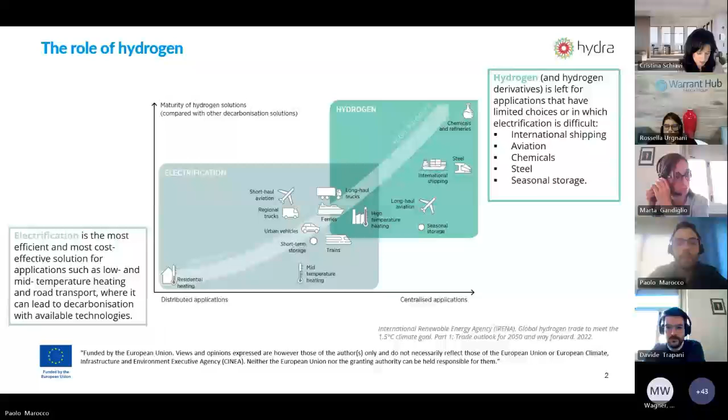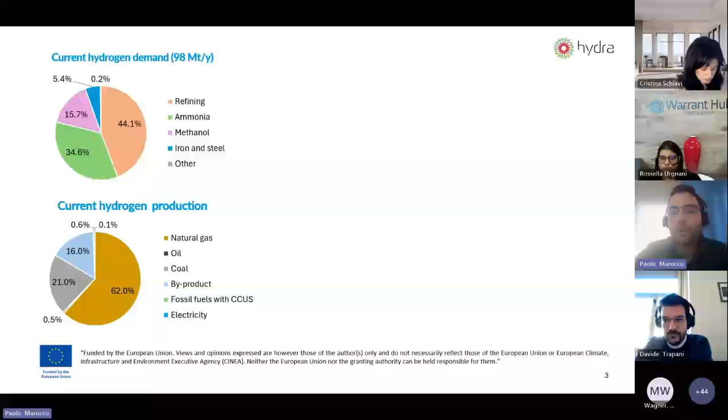So if we want to achieve the main decarbonization targets, we need to produce hydrogen in a sustainable way, and we also need mainly to increase the capacity of electrolyzers.

This is a picture of the hydrogen demand for the current case, but also the expected hydrogen demand in the future. We can see that in 2050, it is expected that the overall hydrogen demand will be around 5 to 6 times higher than the current one. We can see an increase in the demand for industry, but also the appearance of new applications: road mobility, aviation, shipping, and also power production.

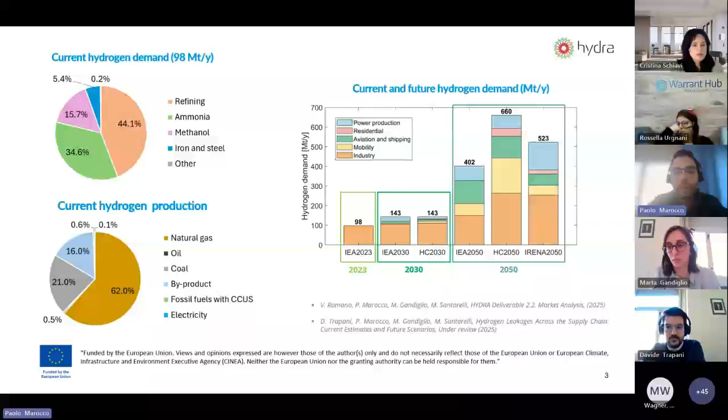In the following slide, we will show a very brief explanation of some key sectors. Starting with the transportation sector, we have batteries that, due to their great efficiency, are the choice to prefer if they are technically feasible.

But when we have mainly weight constraints, batteries are ideal for short to medium distances. As we can see from this graph, they are located in the lower left part, so for vehicles with low weight and also short autonomy. But moving to heavy-duty vehicles that require higher autonomies, we also have the appearance of hydrogen as a good solution for decarbonization.

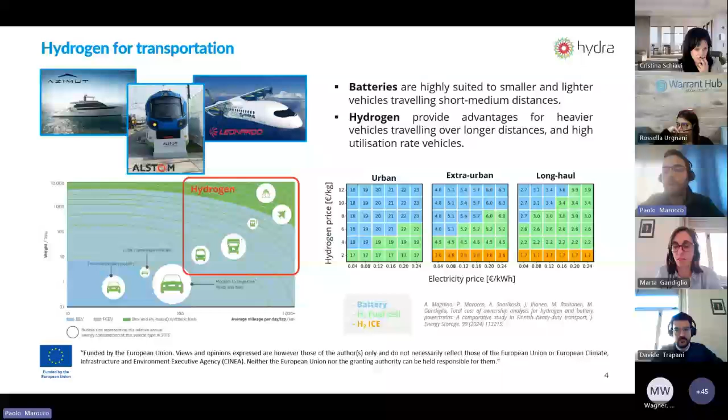The same concept is also clearly shown here, where we have the optimal technology for transport as a function of the electricity price and the hydrogen price. The blue area refers to batteries, whereas the green area refers to the use of fuel cells. We can see that if we move from urban vehicles up to long-haul applications, we have an expansion of the green area, meaning that fuel cells become more and more effective by moving towards heavier duty vehicles.

But hydrogen is also very promising as a long-term energy storage. Here we have a comparison between battery storage and hydrogen storage. Batteries are very promising due to their very high efficiency, which is almost 3 times higher, I mean the round trip efficiency of the storage, than that of hydrogen.

But if we look at the cost to store one unit of energy, so euro per kilowatt hour, we have that the cost of batteries is very high compared to that of hydrogen. This means that batteries are highly effective for short-term energy storage, but hydrogen is also very useful if we move towards seasonal storage. This concept is visible from this picture, which shows the cost of energy as a function of CO2 reduced in the energy system.

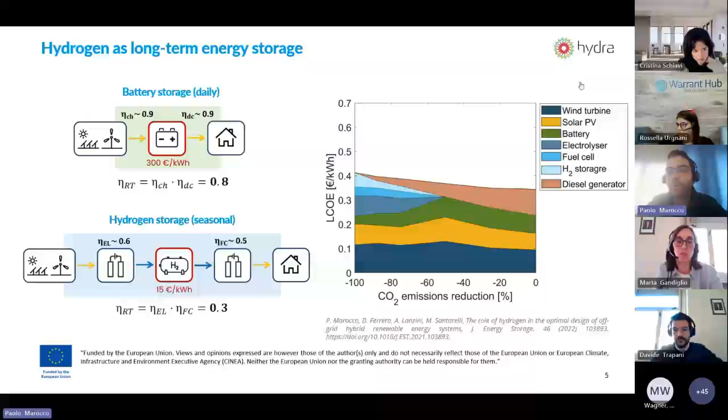This refers to a specific energy system in Northern Europe. We can see that if we decrease the amount of CO2 emissions, we have an increase in the cost of energy. This is because we need to install more renewable power and also more energy storage to cope with this intermittent renewable production.

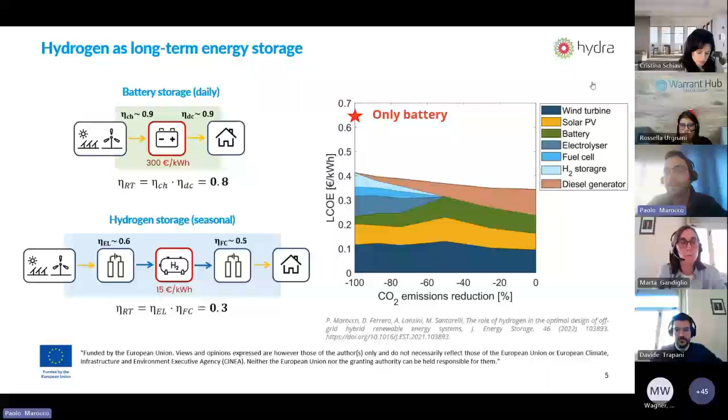We can see that at a certain point, we have also the presence of hydrogen, the blue area, since hydrogen is highly effective to keep low the cost of energy when moving towards a high renewable scenario. This is particularly evident if we compare the cost of hydrogen in the full renewable solution with that of only batteries. If we have only batteries, the cost is very high, but if we have a hybrid solution with both batteries and hydrogen, we can reduce considerably the final cost.

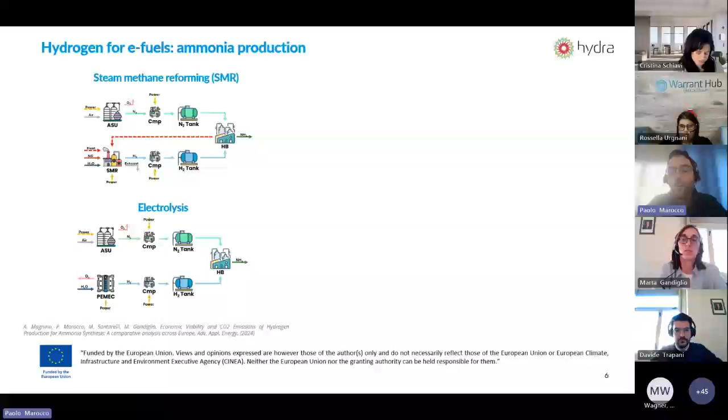Finally, hydrogen is also very effective and can have a role in the production of e-fuels, can be reacted with carbon dioxide to generate carbon-based fuels, but also with nitrogen to generate ammonia. In the upper part, we have the current configuration for the production of ammonia, which is based on natural gas. In the lower part, we have a configuration where hydrogen is generated by considering water electrolysis.

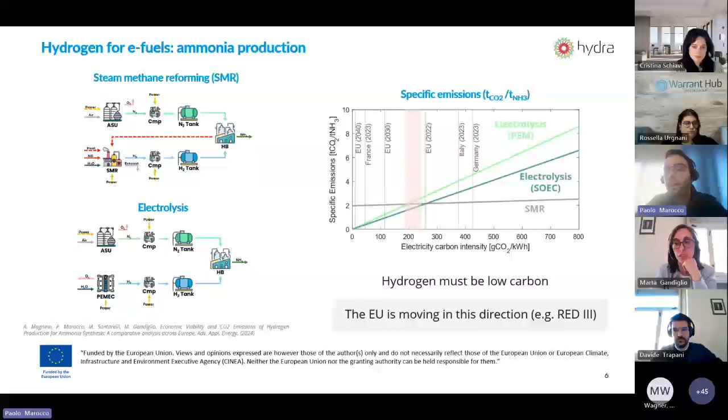And the European Union is moving towards this direction, by setting constraints to produce renewable hydrogen, for example, the recent RED III directive.

Finally, I would like to end this presentation with the example for Italy. In the last few years, several funding have been allocated to hydrogen-based initiatives. This is the example of the PNRR initiative, where funds have been set for the entire supply chain of hydrogen, as we can see from this picture. So for hydrogen production, but also for hydrogen use, hydrogen manufacturing of electrolyzers, research and development.

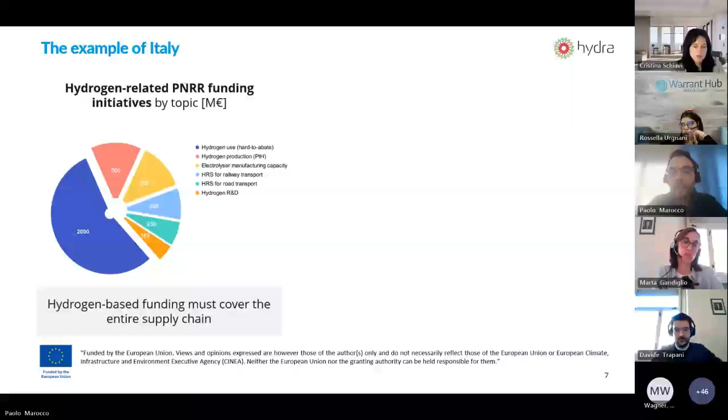I think that this holistic approach is the ideal way to promote the use of hydrogen, not only providing funding for hydrogen production, but also promoting hydrogen demand. This is a scheme that shows the location across Italy of the main hydrogen initiatives and projects that have been funded, in terms of hydrogen production plants, the green dots, but also hydrogen refueling stations, and we can see also hydrogen-based railway lines.

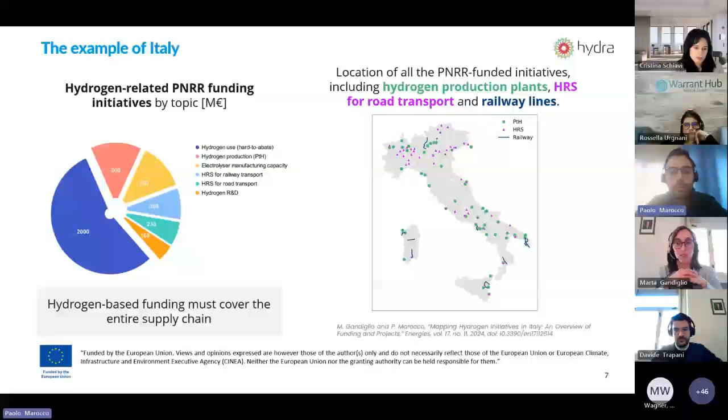Thank you for the attention.

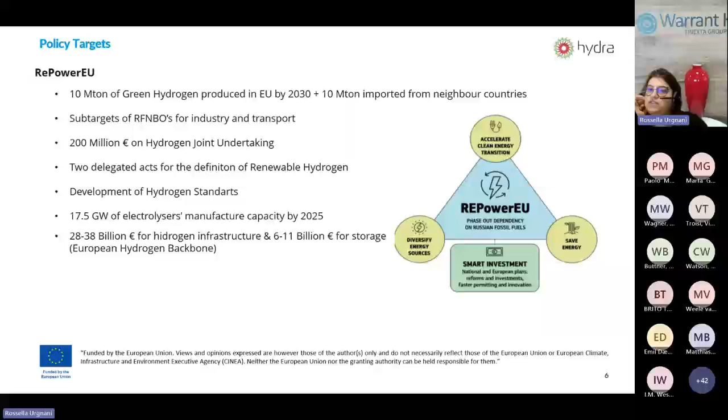And then finally, RePowerEU focuses on creating new hydrogen regulation and standards and keeping track of the hydrogen uptake through periodic reports. So the plan estimates a need for a very fast deployment of infrastructure to reach the requirements of the hydrogen economy, expecting investments of 28 to 38 billion euros for hydrogen infrastructure and 6 to 11 billion for storage infrastructures.

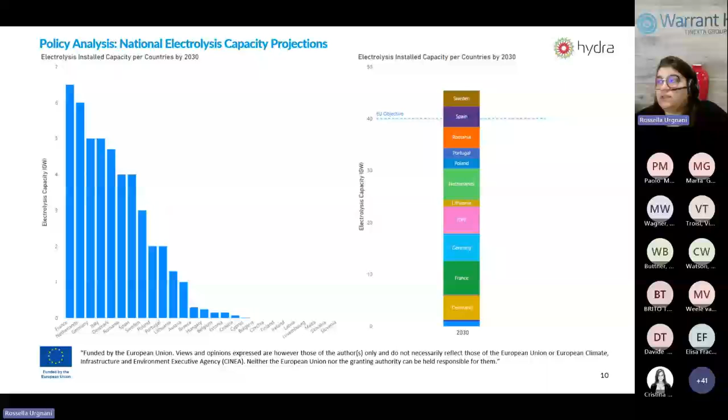A similar analysis was also done considering main countries that have developed hydrogen strategies or have the potential to do so at global level. Outside the European Union, we have even more significant differences. Some countries clearly aim to influence the global hydrogen economy and compete for international trade, while others focus more on just meeting their domestic demand. There are also differences in the goals that were set, because some set just short-term goals, while others looked at more long-term goals, while others even just proposed strategies without setting any goal.

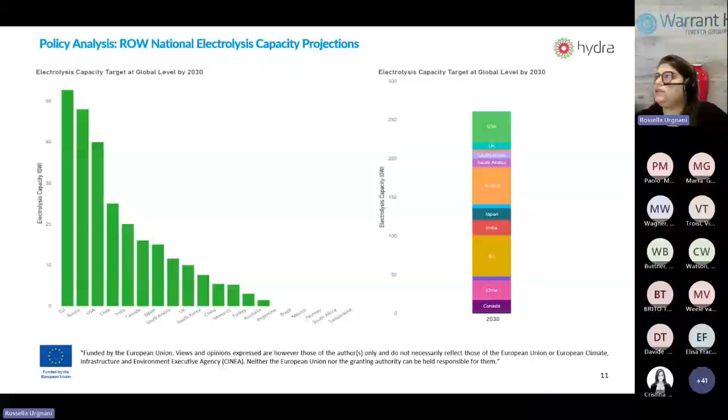However, if we do the same as we did for the European Union and sum all the contributions, by 2030 at global level, the electrolysis capacity could overcome 250 gigawatts.

So just to briefly conclude, from our analysis we have seen that policies are focusing on hydrogen in the last decades, mainly for its production and use in the transport and industrial sector. This is the priority. Our analysis also highlights that the use of direct investment is the main economic instrument to promote hydrogen projects, as well as setting codes and standards for the regulatory instrument part.

However, if we expect a significant impact on the decarbonization of the economy from hydrogen, then we need an aligned legislative effort for all energy sectors and links in the value chain.

It is crucial that hydrogen consumption covers as many appropriate sectors as possible to make the deployment of large production plants profitable. The transition process towards a unified industry cannot be overlooked. So in the short term, generation and consumption may be unbalanced, and it will be necessary to adapt current systems to a new reality of low CO2 emissions and hydrogen consumption.

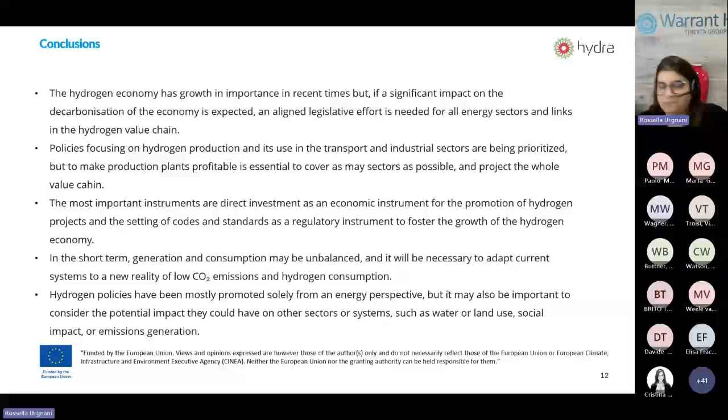Okay, so this was the end of my presentation.

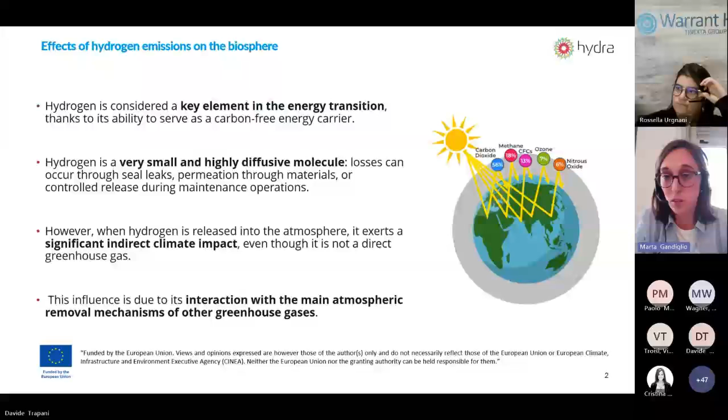Hydrogen is not a greenhouse gas like the ones you can see in the slide, so it doesn't have a direct radiative effect, but it is called an indirect greenhouse gas in the sense that it interacts and alters the mechanism of removal of greenhouse gases within the atmosphere. Let's look at where hydrogen interferes in the atmosphere. Here you can see the atmosphere layers, and hydrogen is changing the equilibrium of the atmosphere in the troposphere and in the stratosphere, so in the two lower layers.

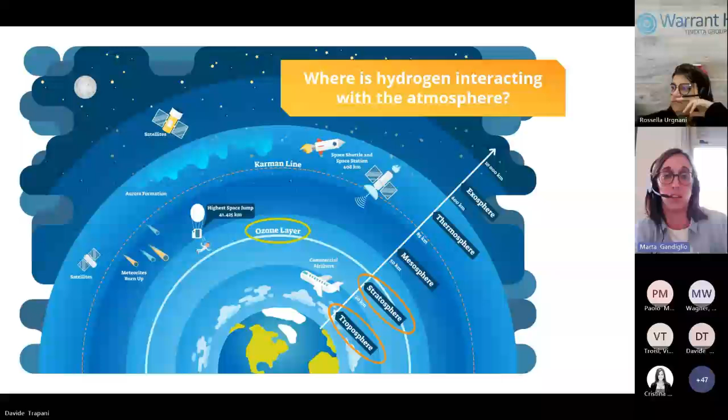Let's see the effects one by one, starting from the troposphere. The first effect is that when hydrogen is released, part of it is absorbed by the soil, but the remaining part is removed through oxidation. In particular, hydrogen oxidation requires and consumes hydroxyl radicals, these OH ions, and this is a problem because these hydroxyls are responsible for methane removal in the atmosphere. By reacting with these radicals, methane is, through a series of reactions, then converted to CO2. So if we use these radicals to oxidate hydrogen, we will have more methane in the troposphere.

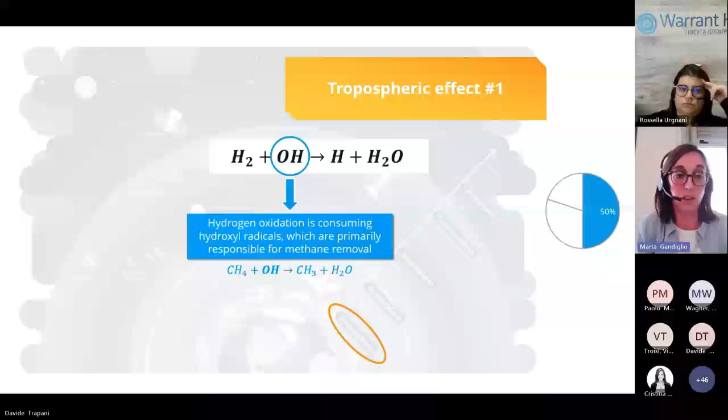This will increase the lifetime of methane in the troposphere. This is the largest climate effect of hydrogen, accounting for about 50% of its climate impact.

The second effect, again in the troposphere, is linked with the production of atomic hydrogen. When hydrogen is oxidized, it produces atomic hydrogen, and atomic hydrogen, through a series of different reactions, increases ozone in the troposphere, which is a greenhouse gas. This effect accounts for 20% of the climate impact of hydrogen.

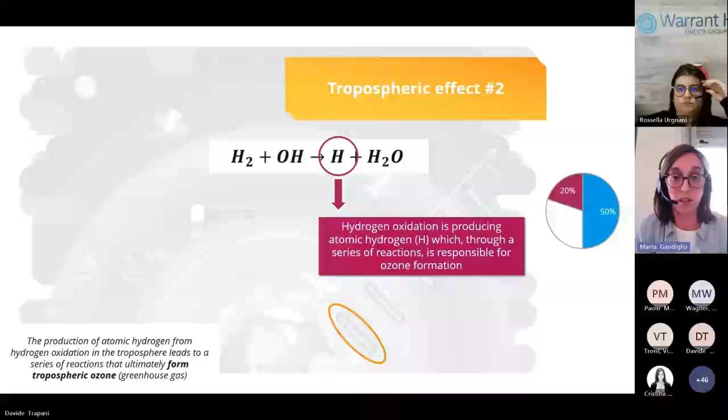The last effect, which has been discovered more recently, occurs in the stratosphere and is related to water vapor formation. In the stratosphere, when water vapor is formed from hydrogen oxidation, the effect is that the stratosphere is cooled down, so the temperature of the stratosphere is reduced.

This stratospheric cooling leads to mainly two effects. The major one is that, being at a lower temperature, the stratosphere emits less radiation back to space, so we have more heat trapped within the atmosphere, having an effect on global warming. The second, minor effect is that the water vapor is also responsible for the formation of polar stratospheric clouds, which reduce the ozone layer that protects us from UV radiation.

If we consider all these effects together, we can calculate the global warming potential of hydrogen, which is the amount of energy absorbed in the atmosphere over a certain time horizon compared to that of CO2. The global warming potential of CO2 is 1. Here you can see the graph for the global warming potential of hydrogen over 20 and 100 years. In 20 years, especially in the short term, the effect of hydrogen can be 20 to 45 times that of CO2, and in 100 years it can be between 4 and 18, depending on the quite big range of uncertainty.

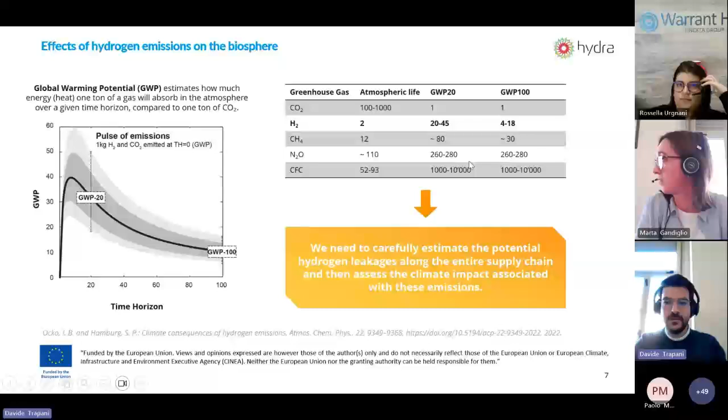In the final remark of Marta's presentation, she mentioned the hydrogen supply chain, and this is the starting point of my presentation. I would like to start exploring the concept of hydrogen supply chain. Typically this term is used to describe the entire set of processes that are carried out from hydrogen production to hydrogen uses.

The starting point of our activity is shown in this slide, in which we present our structure of the hydrogen supply chain. The supply chain consists of 5 main stages: production, handling, storage, transport, and end uses. To develop a leakage estimation framework, the first step of our activity was a disaggregation of this supply chain structure into the processes that can be identified in each stage of the supply chain.

So we decided to disaggregate hydrogen production, considering the well-established technologies used at present, and the most promising technologies that can be adopted in the near future and in long-term scenarios. For hydrogen production, we considered production through electrolysis, steam methane reforming both conventional and equipped with carbon capture utilization and storage technologies, and also coal gasification.

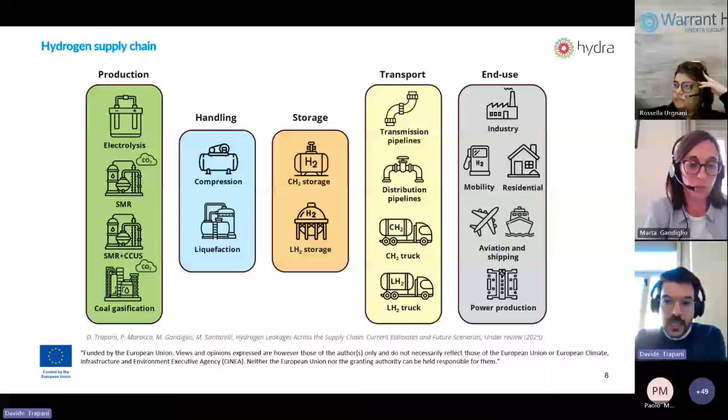Hydrogen leakages can occur in each stage of the hydrogen supply chain I've just described. They are usually classified as intentional or unintentional. If we focus on unintentional hydrogen leakages, they can be further distinguished into operational and fugitive emissions. For operational leakages, we can consider the residual hydrogen stream in exhaust gas flow, for example hydrogen crossover in electrolyzers, but also the boil-off losses that are peculiar to liquid hydrogen storage solutions.

If we focus on fugitive emissions, they can happen as a leakage from equipment, though these are usually negligible, but also from pipework—pipes, valves, joints, and seals. Focusing on pipelines, we also have hydrogen diffusion from the pipeline itself, and the last fugitive leakage can occur as permeation from storage tanks. If we focus on intentional hydrogen leakages, they are only operational, mostly related to purging and venting operations, mainly in hydrogen production, storage, or refueling operations.

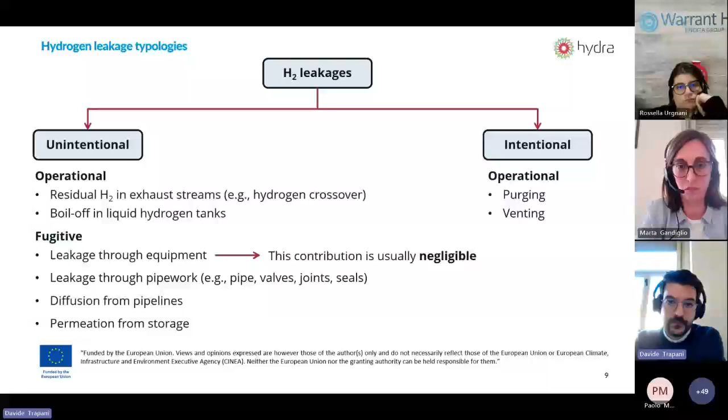Hydrogen leakages can occur throughout the hydrogen value chain, but at present the exact amount of hydrogen that is emitted and lost into the atmosphere is almost unknown, due to the lack of proper instruments able to detect part-per-billion concentrations. The sensors currently available at industrial level are installed mainly for safety purposes, so they are only able to detect hydrogen concentration in a part-per-million range. This is the main reason behind the lack of direct measurement.

So if you want an estimate of the hydrogen leakage rate along the value chain, we have to rely on estimates from literature. In our case, literature includes both peer-reviewed articles—scientific papers—but also technical reports. Technical reports turn out to be extremely useful because they are based on the technical expertise from industrial professionals, reflecting direct or field experience on existing technologies. So technical reports provided valuable insights for estimating hydrogen leakage.

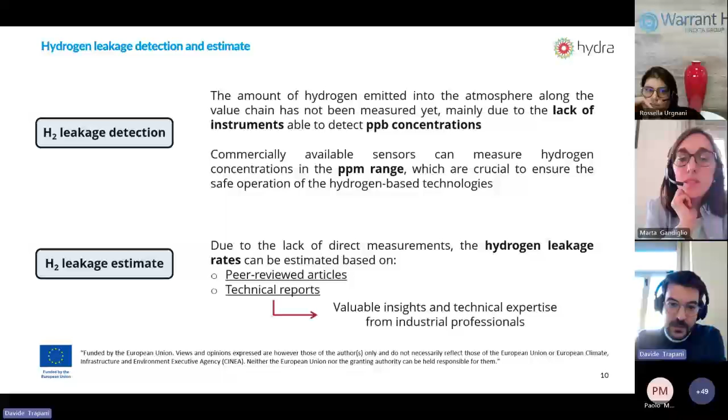The next step, in order to create the leakage estimation framework I was mentioning, was the identification and disaggregation of the hydrogen value chain. The next step was data collection and the creation of a comprehensive database of the hydrogen leakage rates per each stage of the hydrogen supply chain. Based on data collection from the literature, we were able to estimate the average leakage rate, and to identify a minimum-maximum variation for each technology and process.

And this is one of the main results of the activity we have carried out in the framework of the Hydra project. If we focus a bit on the numbers and results of this database, we can see that electrolysis exhibits the highest leakage rate and also the largest variation among the hydrogen production routes.

So comparing renewable or low carbon hydrogen with alternative, both conventional and innovative solutions, electrolysis is one of the most leakage-prone processes.

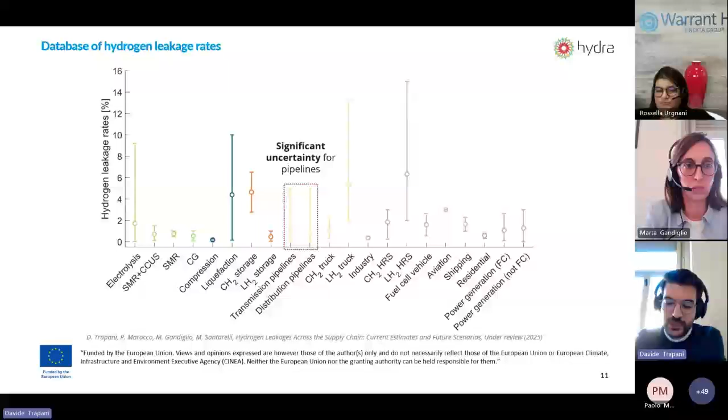We saw that electrolysis is one of the most leakage-prone processes. I would like to focus a bit on electrolysis and electrolyzers to describe the main and potential hydrogen leakage sources that can cause hydrogen emission in these technologies.

As we saw before, usually the leakages through the casing and the pipework can be negligible. This is especially true for electrolyzers, because the manufacturing has to be compliant with ISO standard 22734. So in this case, this contribution can be considered negligible.

But the main hydrogen leakage phenomena are related to venting and purging, as I said before. For venting, hydrogen is released into the atmosphere during startup and shutdown operations. In this case, hydrogen venting can be estimated as 0.1% of hydrogen production. This is obviously dependent on the number of startup and shutdown procedures carried out during a year.

This can obviously depend on the operating strategy of the electrolyzer itself, but we can estimate that between 50 and 300 startup and shutdown procedures are performed every year, and each procedure can last between 5 and 10 minutes. So we can basically calculate the amount of hydrogen released per year due to this kind of operation.

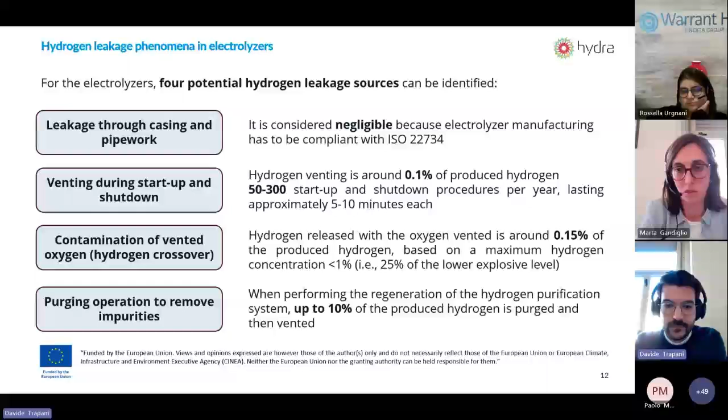If we move forward in the development of our leakage estimation framework, we have identified the processes in the hydrogen supply chain and characterized each process with an estimate of the hydrogen leakage rate. So we now need data related to hydrogen demand and the hydrogen quantities flowing in each step of the hydrogen supply chain itself.

To do so, we relied on hydrogen demand data and hydrogen supply chain structure from leading international organizations in the energy sector, in particular the International Energy Agency, the Hydrogen Council, and the International Renewable Energy Agency. Based on the data available from these organizations, we were able to identify, define, and assess hydrogen scenarios at present.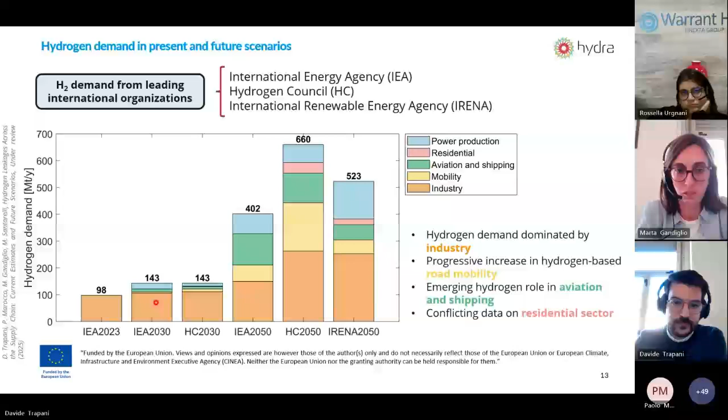So basically, to sum up what we have done: combining the leakage rate and the hydrogen quantity in each stage of the supply chain, we were able to estimate the hydrogen leakages along the supply chain. In this slide, we have summarized all the results for the different scenarios.

According to data provided by the International Energy Agency for 2023, we can estimate that at present 1.3 million tons of hydrogen are emitted to the atmosphere per year based on the existing scenario. These leakages increase by almost a factor of 3 in both the IEA and Hydrogen Council scenarios for 2030, and dramatically increase for long-term scenarios, reaching up to 45.3 million tons per year in the Hydrogen Council scenario, while estimates for the International Energy Agency and IRENA for 2050 are almost around 24 million tons per year.

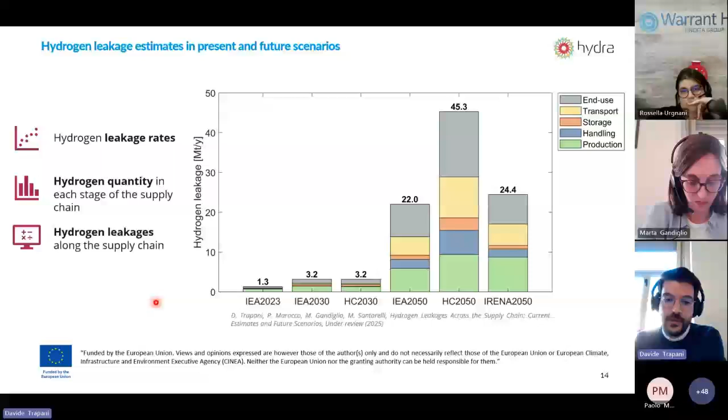If we compare this number with the projected hydrogen demand, we can estimate a leakage rate for the entire supply chain. For the present scenario, it can be estimated at 1.3%, while for 2030 it's around 2.2% for both scenarios under investigation, and for the 2050 scenario it can range from 4.7 up to 6.9%.

We double-checked our results with data available in the literature, and we found that these results are consistent with literature estimates, reporting a value of 1.2% for the 2020 scenario and a leakage rate in the range between 4.5 and 5.6% for the 2050 scenario. So the methodology we developed is robust, and the results are in line with strong references available in the literature.

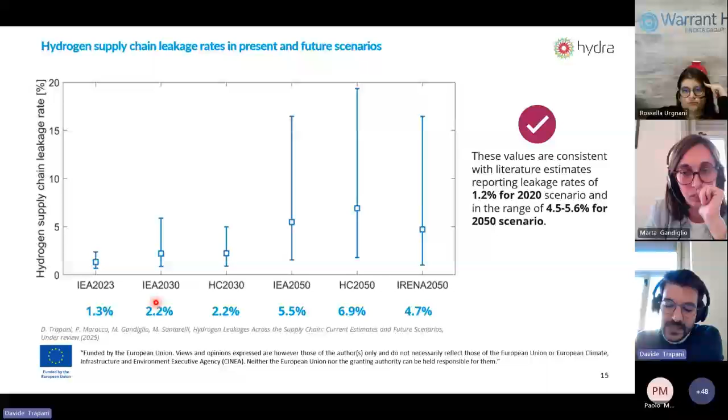But we moved forward compared to what is usually done in the literature, because we tried to identify the main responsible factors for hydrogen leakages along the supply chain. To do so, we performed a hydrogen leakage breakdown for both the 2030 and 2050 scenarios, with the aim of identifying the processes responsible for the largest shares of hydrogen leakage.

If we focus on the 2030 scenario, we can see that electrolysis, despite covering a limited share of hydrogen demand, is responsible for more than 50% of the total leakages released during the production stage.

If we focus on the pie chart on the right-hand side of the slide, we can see that Hydrogen Council was one of the scenarios projecting demand in the residential sector. This implies both a leakage in the residential end uses themselves, but also a leakage in the distribution pipelines that are the solution adopted to serve the residential demand.

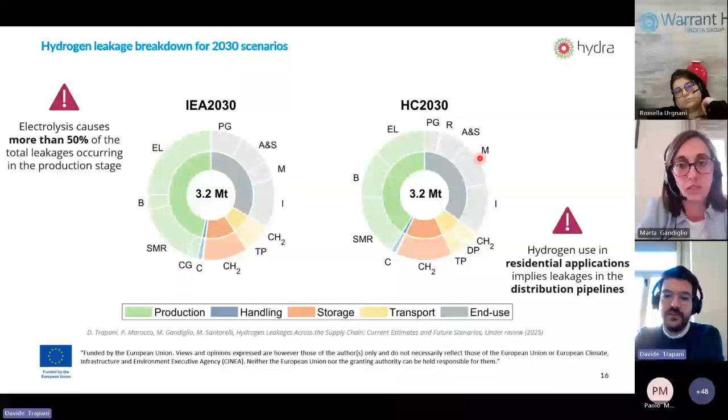If we go to the 2050 scenarios, we can see that in all scenarios electrolysis confirms its potential critical role among the different production pathways. This is a very interesting result, because all the 2050 scenarios have a large reliance on these technologies, but we have to take into consideration this potential criticality.

We can also note that liquid hydrogen emerges as a key contributor in both the handling and transport phases, which was not true for the 2030 scenario. So in the long-term scenario, liquid hydrogen will be responsible for a large share of hydrogen leakages in the different phases of the hydrogen supply chain.

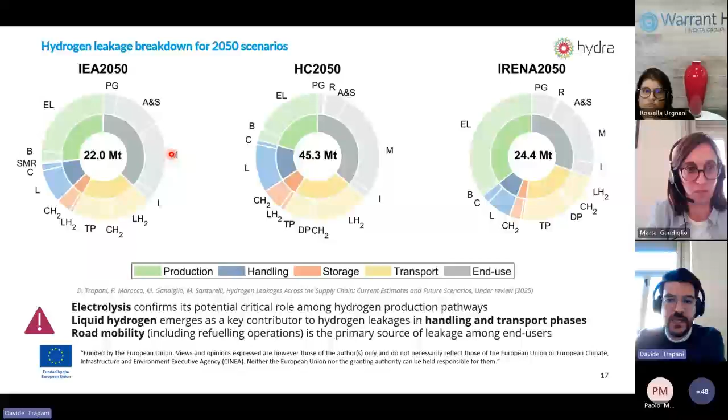We can also note that road mobility, including refueling operations, will be one of the primary leakage sources among end users, as we can see in all the pie charts in the slides.

So to go to the conclusions and take-home messages from the presentation: we saw in Marta's presentation that hydrogen is not a greenhouse gas, but it does contribute with an indirect climate effect. Hydrogen leakage, we saw, can occur at each stage of the supply chain.

And basically, the amount of hydrogen leakage is still unknown. So we also noted that when we try to quantify the hydrogen leakage rate, we face a lot of uncertainty that translates into a significant variability in the hydrogen leakage rate.

If we focus on the result, we can note that electrolysis emerges as a leakage-prone process among the production pathways, and liquid hydrogen involves multiple critical processes like liquefaction, transport, and refueling.

Therefore, in order to fully exploit the hydrogen potential for the energy transition, we need a precise and reliable sensor and monitoring procedure to quantify the hydrogen leakage phenomena and to mitigate them.

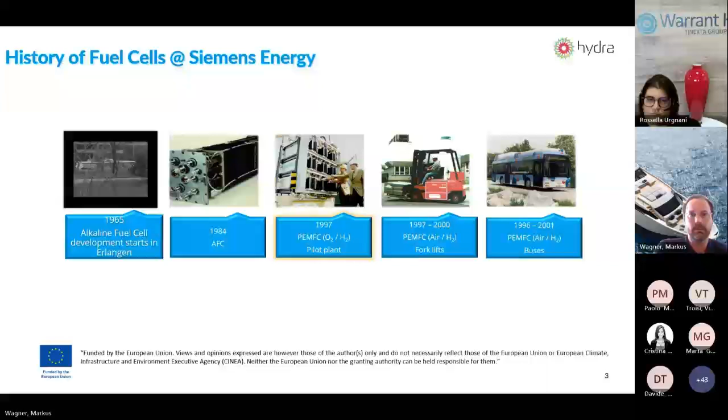Our company is very experienced when it comes to fuel cells. As you can see here on the left side, we already started in 1965 putting fuel cells into vessels and ships, and everything evolved from there. Nowadays our focus is on fuel cells fed by hydrogen and pure oxygen, but we already built forklifts and buses around 2000. In Erlangen we have a huge test facility where we build up the system and do our daily business, and where we tested the system for the Live Ocean project.

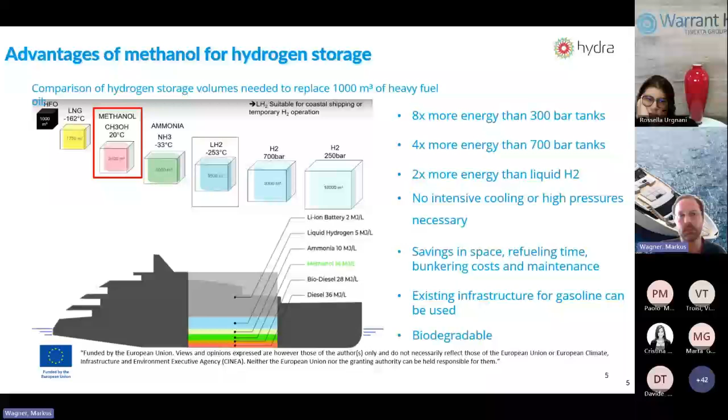Now the question is, why alcohol, or especially methanol, for shipping? Methanol has a lot of advantages compared to other hydrogen storage technologies. The storage capacity is much higher than compressed or liquefied hydrogen, and compared to ammonia, which is also in the race for fueling vessels with hydrogen, methanol does not need to be cooled down or compressed. So it's easy to handle, and you can basically just use the infrastructure you have already today. That's the reason methanol is very favorable for the shipping industry to be used in the future.

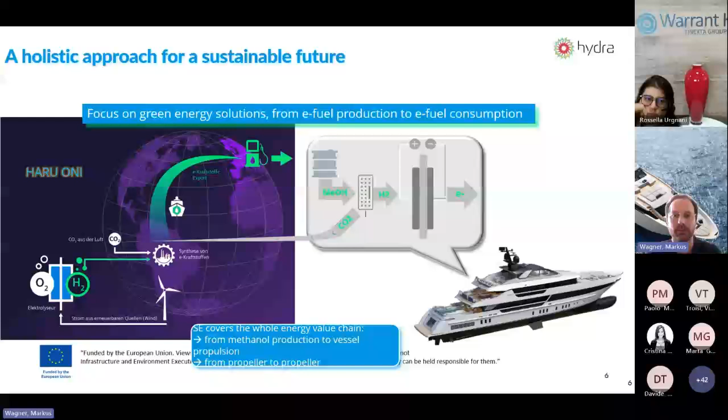As some of you may know, Siemens Energy is also into the production of methanol itself. In South America, we have the HARU ONI project where wind energy is used to produce methanol. So we have somehow a holistic approach to create methanol, let's say from a propeller, from wind energy, up to the propeller in the vessel to accelerate the vessel.

Our next question was, how do we want to proceed in the project? There are two possible solutions: you can either use an external reformer where you put in the methanol, with an LTPEM fuel cell to create electricity, or you go with the HTPEM. The basic principle is you don't use pure methanol, you always need to mix it with water, ratio 60-40 more or less, and then you put it into a reformer, then you get hydrogen, which you feed into the fuel cell, and then you get the electricity.

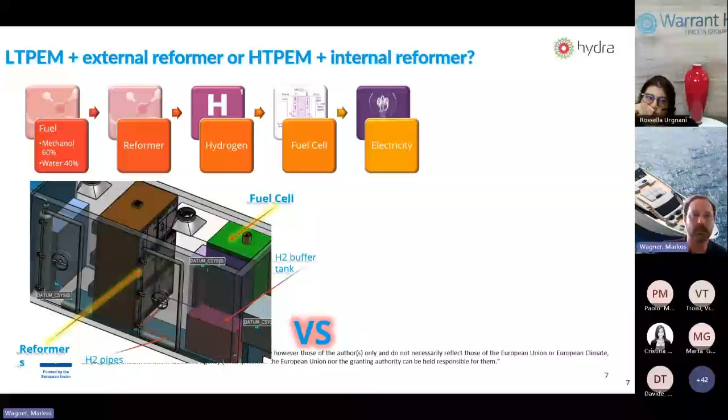This was pretty troublesome, and that's one of the reasons we decided to go with an HTPEM solution. The difference is that the HT solutions available on the market are small boxes where the reformer is pretty close to the fuel cell, so the hydrogen has a very small distance to go from the reformer to the fuel cell, just a few centimeters. Due to the HTPEM technology, you have higher temperatures, so you don't need to clean the hydrogen produced in the reformer from poisonous byproducts that could harm LTPEM fuel cells. HTPEMs don't have this problem.

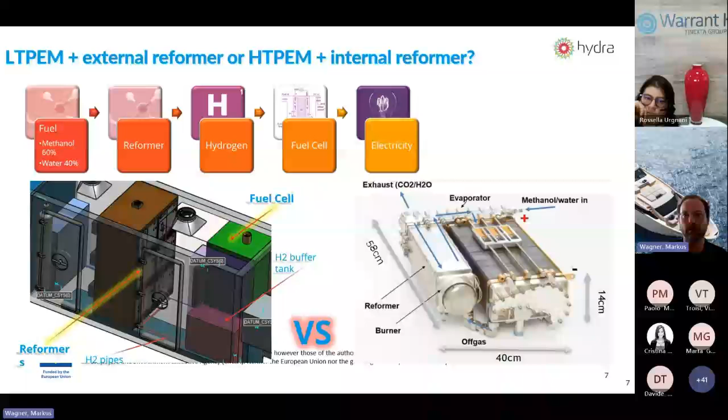You can see our final solution as a 3D model.

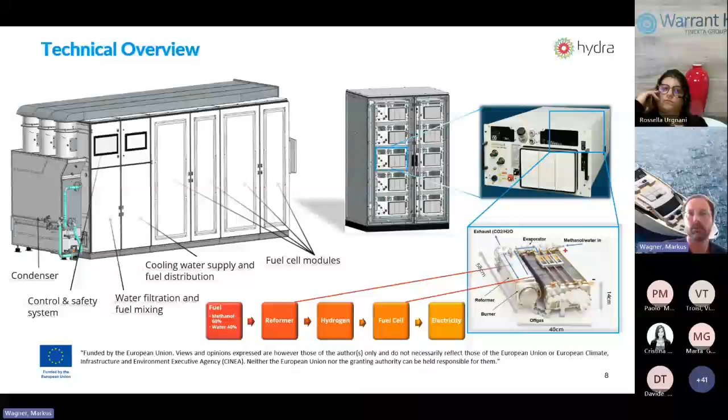Another advantage is that you have a lot of single units with reformer and fuel cell, so in case one breaks for any reason, it's easy to swap it out and swap a new one in, and the system keeps running. That's also an advantage compared to the LTPEM version with external reformers.

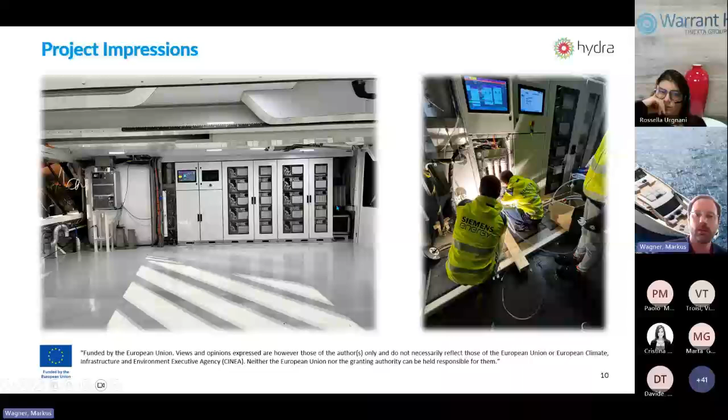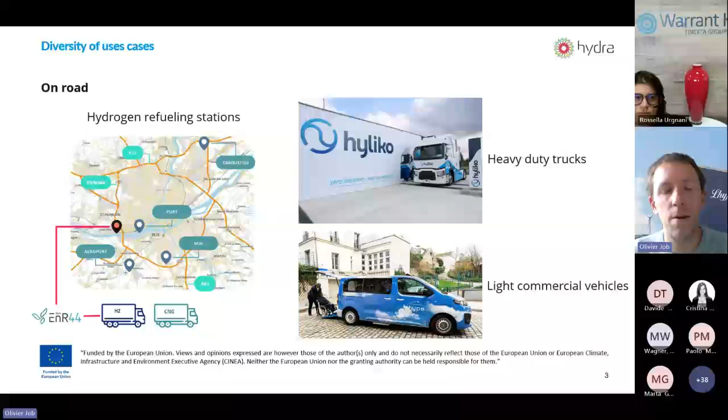And on the other hand, we have off-road usages of hydrogen, still using fuel cells, because this is the technology implemented in those vehicles. We are implementing and contemplating deploying harbor logistics thanks to fuel cell technology, because one of our partners is in the Saint-Nazaire Harbor for the logistics.

And we are also partnered with the Department of Loire-Atlantique, with the ferry, which goes from the south shore of the Loire River to the north shore of the Loire River, in order to make the path for people coming from one shore to the other, for pedestrians and cars. So we have those specific usages also within the scope of the project that will be deployed during the AdvancedH2Valley program.

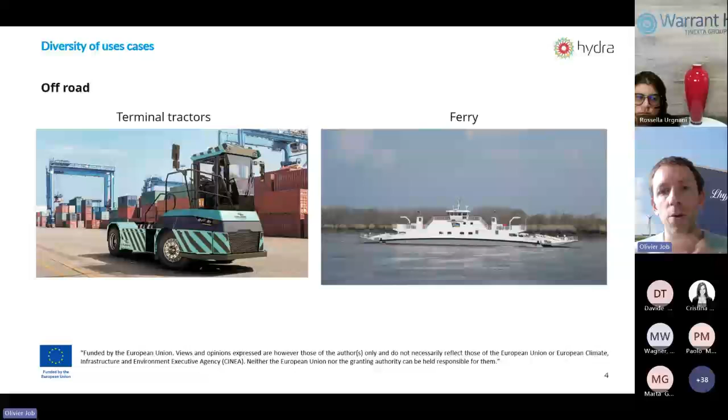And all the supply chain will be made, if I come back, from the production sites to the consumption sites with a supply chain made of truck trailers, because we produce the hydrogen compressed at 380 bar, and we send it by trucks to the consumption sites, whether it is a hydrogen refilling station or small industrial consumers. So this is the way we would like to upscale the hydrogen economy here in the western part of France. Thank you.

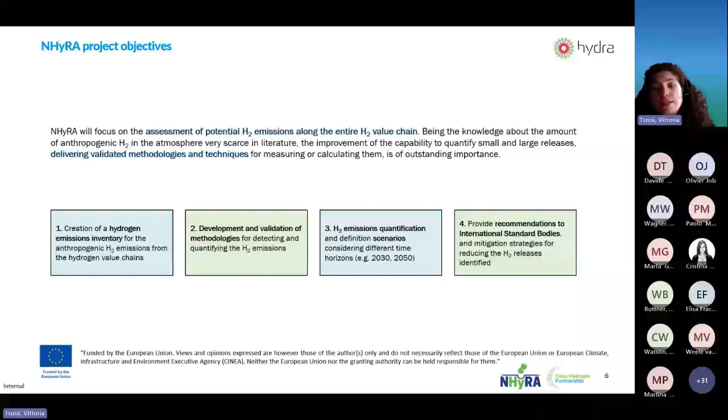Here you can see the overview of the work package activities and how they are interconnected. First of all, work package 1, led by Unibo, is focused on the definition of a hydrogen releases inventory, starting with the identification of the sections of the supply chain which are expected to release the major quantity of hydrogen.

Then there will be the assessment of the protocols and methodologies for the quantification of hydrogen releases in units, both theoretical and experimental. And of course these methods will be validated through laboratory and field test assessment in work package 3.

Then the results of these experiments will be included in the hydrogen releases inventory that will be updated until the end of the process. So the core is to update and deliver to the European community this hydrogen releases inventory, covering the major sections of the supply chain of hydrogen—production, storage, transportation, and end users—coming both from literature and from experimental results performed during the project.

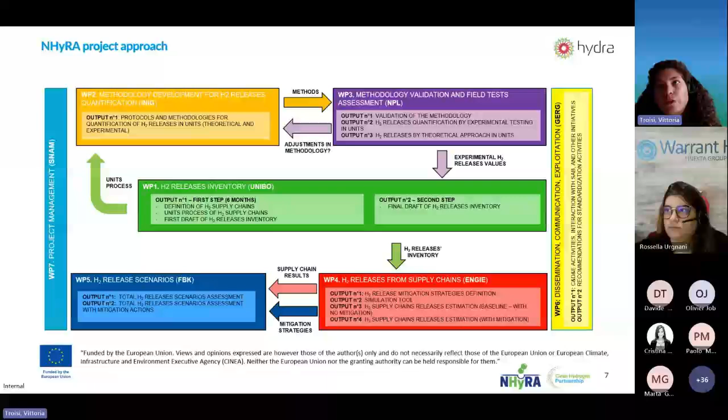These will feed the hydrogen releases scenarios at different time horizons, designed both with and without mitigation actions. Of course, we have the work packages related to management and communication and dissemination that will go through the entire duration of the project.

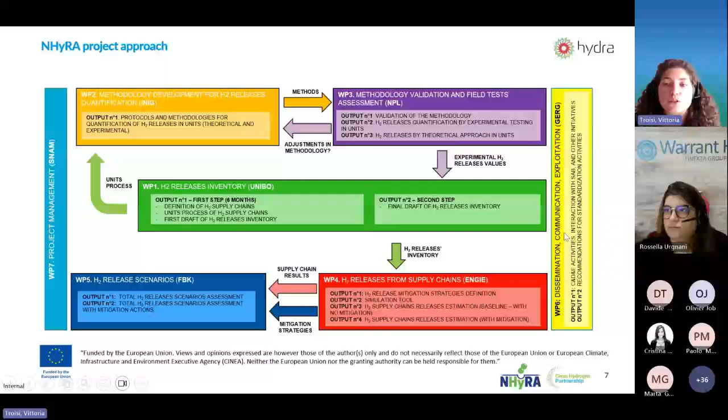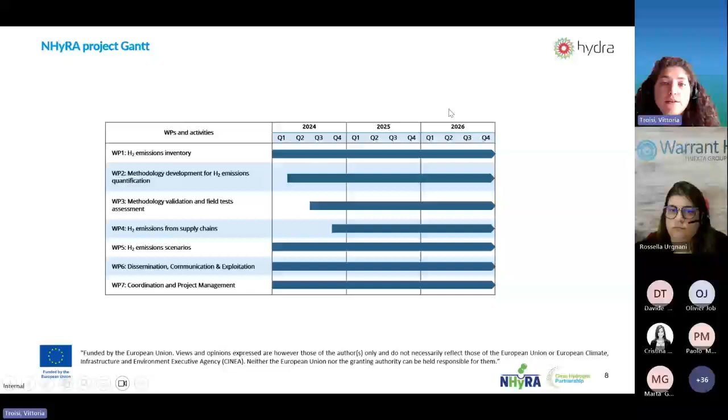As you can see in the timeline of activities, we are now at the beginning of 2025, and all the work packages have started. I will go briefly through the main work packages, and recall that the majority of the deliverables of this project will be published on the NHyRA website, which is already available, and you can contact us for further details.

Just so you're aware, soon two deliverables related to work package 1 will be published on the NHyRA website: one related to the description of the main routes of the hydrogen supply chains, especially focused on the sections expected to release the major quantity of hydrogen, and the first version of the hydrogen releases inventory, which will be updated up to the end of the project.

Because we know that up to now, the literature is scarce in this context, and also data maybe are not in agreement, and sometimes it's also difficult to compare data because of different units of measures, different conventions. So it's really necessary to have available data together and also to point out what is needed, in which sections it's necessary to focus future research.

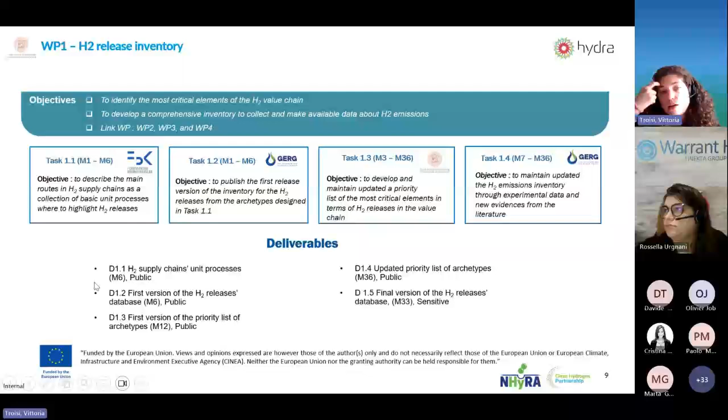These public deliverables will be soon available on the NHyRA website. Also speaking about work package 2, that is more focused on the development of methodology for hydrogen release quantification.

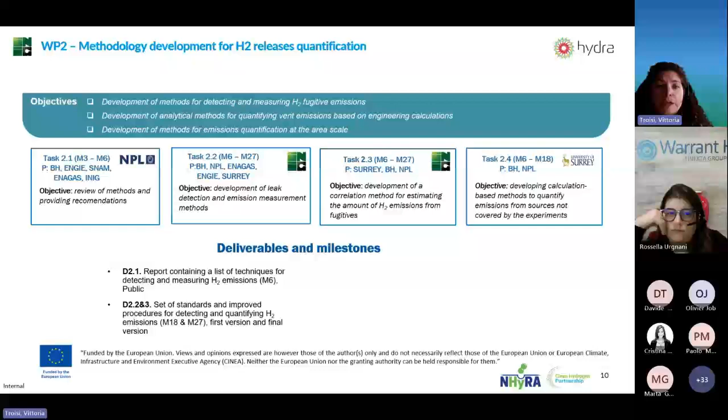In this concern, it will be available soon, still public, a report which contains a list of techniques for the detection and measurement of hydrogen emissions, because as mentioned in a previous presentation, it's still really necessary to assess and agree on the methodologies available for detecting hydrogen, both for safety reasons and, of course, economical reasons.

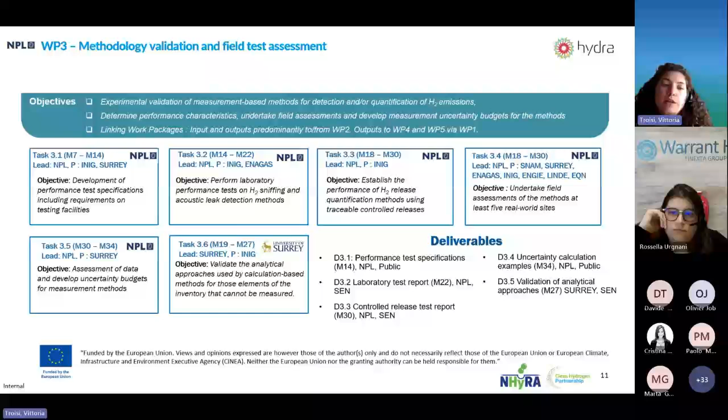As far as work package 3 activities are concerned, these are more concentrated on experimental work for both laboratory and field tests in order to validate the methodologies previously defined. In this case, we will also hopefully start the field test activity by next June, and we will use sites available from our consortium partners and also outside the consortium.

Work package 4, as I was mentioning, is mainly focused on the development of a simulation tool that will try to predict hydrogen emissions from specific sections of the supply chain. We will also organize workshops with manufacturers, for example of electrolyzers, in order to get their real necessities and have feedback from real world industries, to understand where to focus and which are the main parameters to consider in developing this tool.

Finally, the last technical work package is the one that will focus on the definition of hydrogen release scenarios. This activity is already ongoing and will proceed until the end of the project.

I would also like to mention an important activity included in this work package, the cooperation with projects that are synergetic to NHyRA. For example, the Hydra project, because they have synergetic objectives, and it's really important to compare and exchange even the main results in order to achieve common goals.